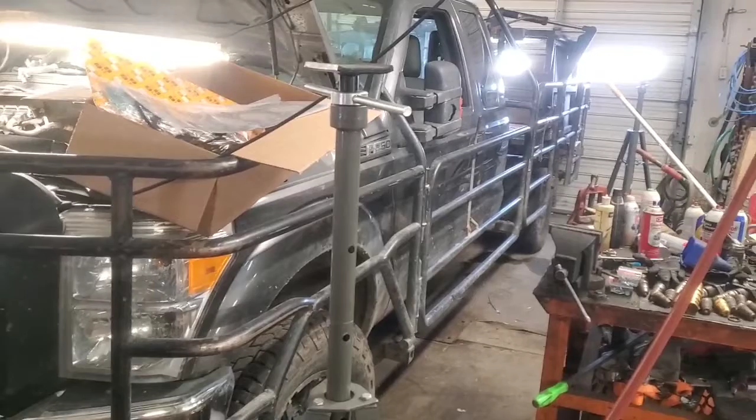Hey folks, welcome back. We're continuing on here with what we've been calling the Jurassic Park truck. You can go back to our first video where we talk about what this thing does, because it's sort of unique. Anyways, today we're doing the engine timing. We've got this 6.2 liter V8 gas, and we're gonna get all the timing components back on it and everything, so that's what I'm bringing you along with here.

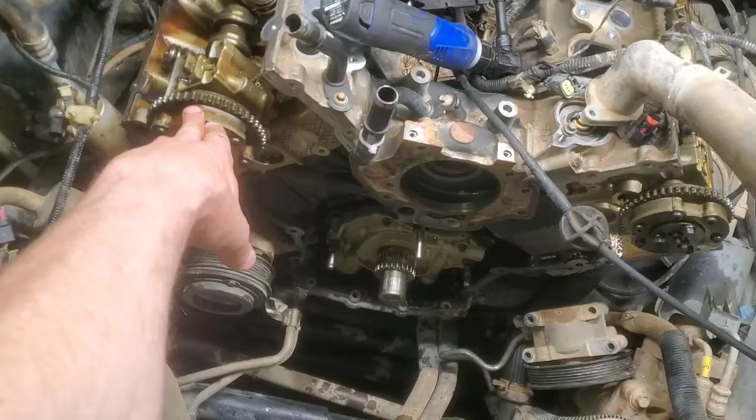To start out with, all of your rocker arms need to be off, and that will allow you to... if you don't, they'll settle away from the pressure of the valve and all that kind of stuff. I remember when I took one of the timing chains loose, this side went like that, and trying to get it back in there - as per the manual, it even tells you to have them off. And then they've got their own torque sequence about which ones to start with, but you want to have all the timing gears and all that stuff on here first.

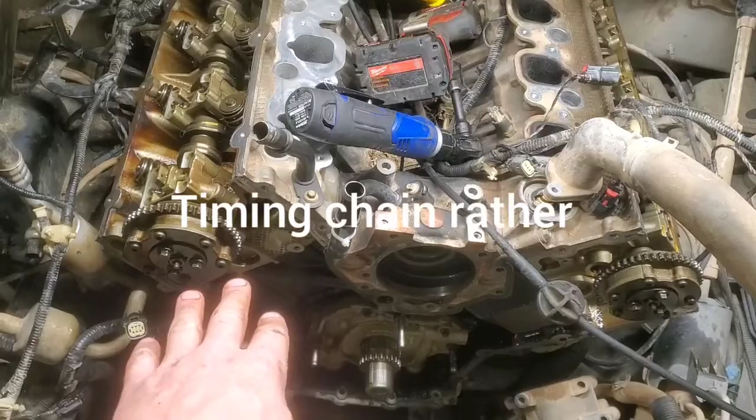So right now what we've got is the keyway right here is at about the 11 o'clock position - that's what the service manual says. And we've got the number one cylinder, which this is number one. The way this engine is, it's backwards from the way Ford used to do it. But we've got 1, 2, 3, 4, and then 5, 6, 7, 8 on that side.

So number one, the piston is all the way up at the top. Now when I set it that way, making sure that number one piston was all the way up top at the power stroke, which is basically exactly the way this camshaft is - because it doesn't matter now, I can move the crankshaft all I want to, as long as that piston is up at top dead center. This isn't going to move because there's no chain on it. But now that it will, you can see the timing mark right there, and it's going to be in about that position. I'm going to show you a picture in just a second.

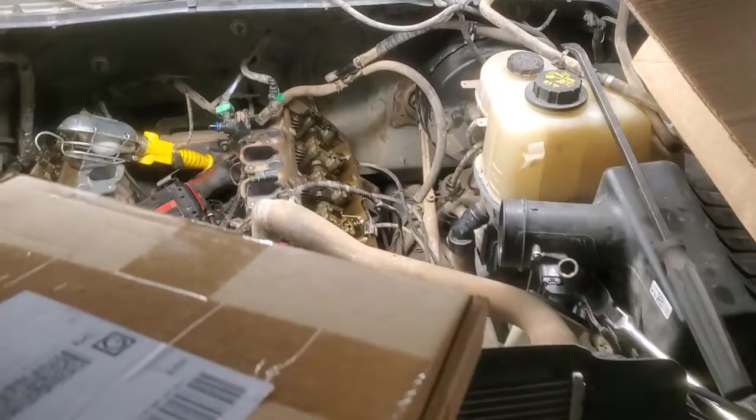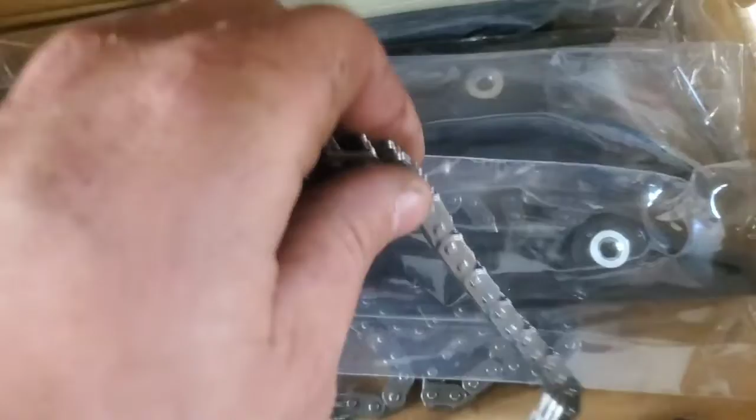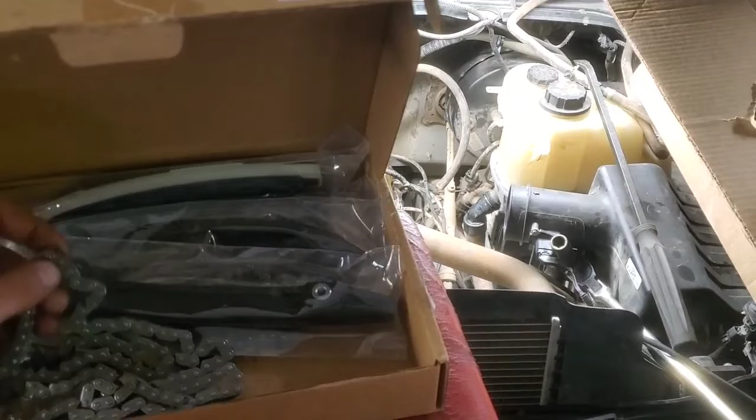And then we've got our chains, and somewhere on here they've got a different colored link. There's one right there, and then there's another one right here. Now, near as I could tell, I stretched this chain out and these links are exactly opposite of each other. I haven't seen anything in the service manual about the direction the chain goes, and I don't think it matters, but we'll figure that out because we'll know if the timing marks line up. But I think they're exactly apart - I'll show you that here.

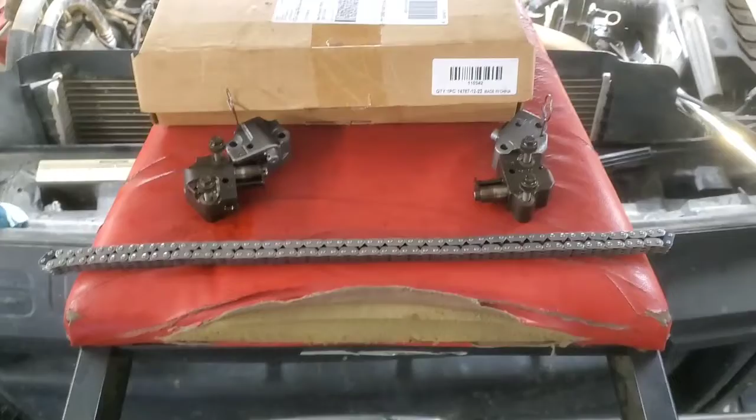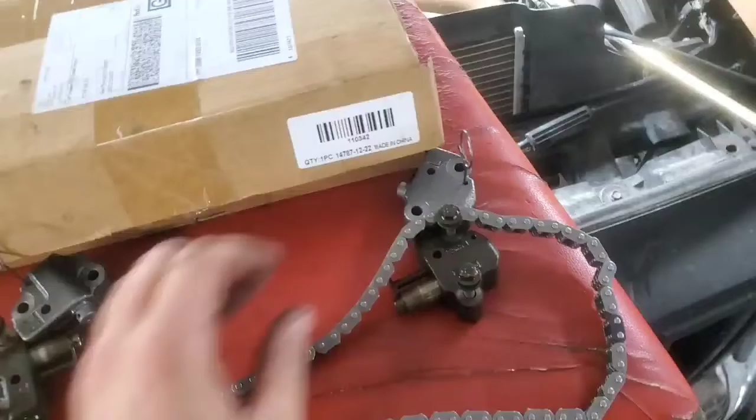Okay, so you can see how you got it all the way stretched out, and your colored links are exactly apart, so it should not matter which way this chain goes. I don't think you could put it on any other way - I guess you'd be putting it on backwards like this or something. I guess there's just no other way to really get it, so wouldn't worry about that. But sometimes on some vehicles, it's just that way.

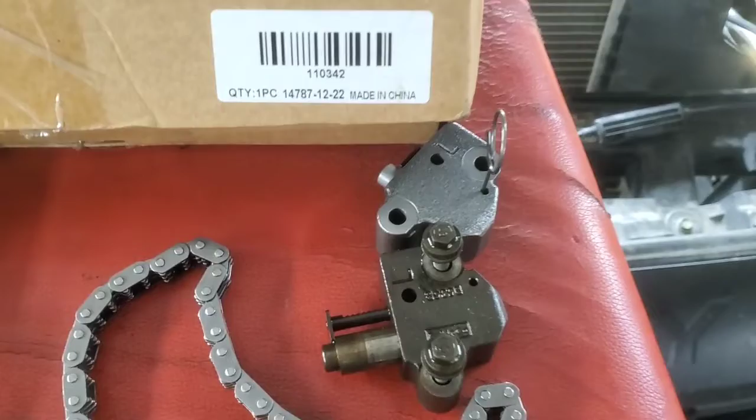These are the tensioners - there is a right and a left. You can see these ones are brand new. It's got this pin already in here, but you can see the plunger - if you were reusing these, you can take them and put them in a vise, then stick a pin down in that hole right there until it locks in. There's your left side. When they're talking about right and left, we're always talking about this being the right side of the engine if you were sitting behind it - that's just how they do it. So that's the left side of the engine, and that's the right side.

So yeah, let's go have a look-see at the pictures in the service manual, and we'll hold on a sec.

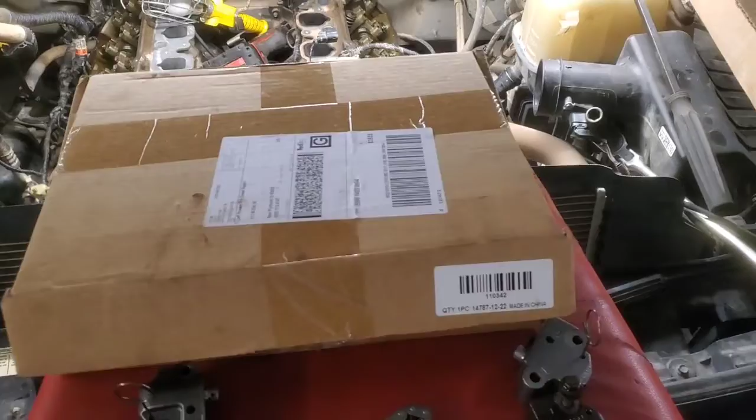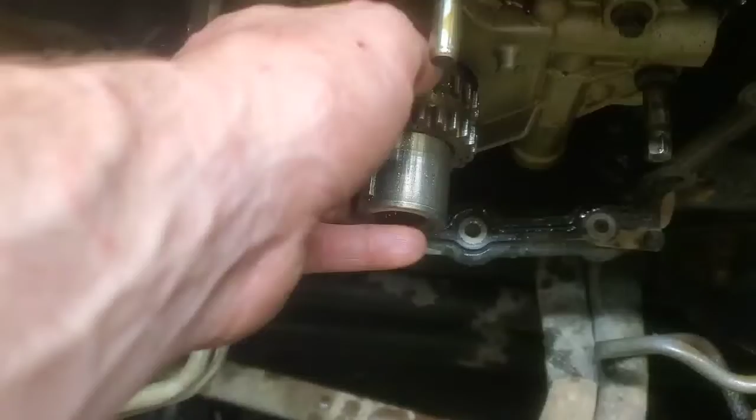We're not replacing the cam phaser sprockets - we didn't get any new ones of those - but that gear right there, it comes off. It comes off here, but it slides over the top. Here's like a Woodruff key for your harmonic balancer, but it just slides right off of here.

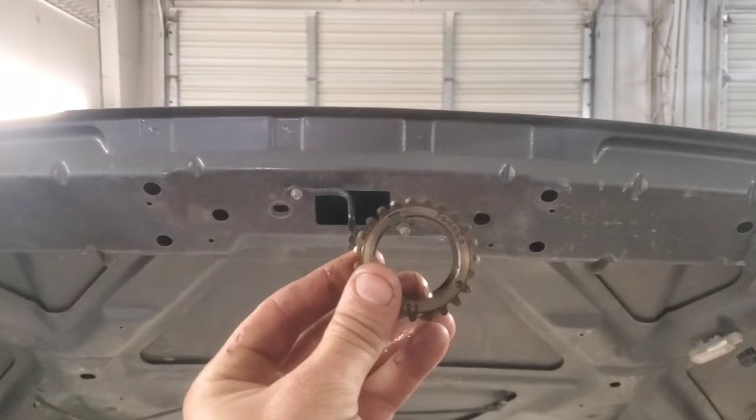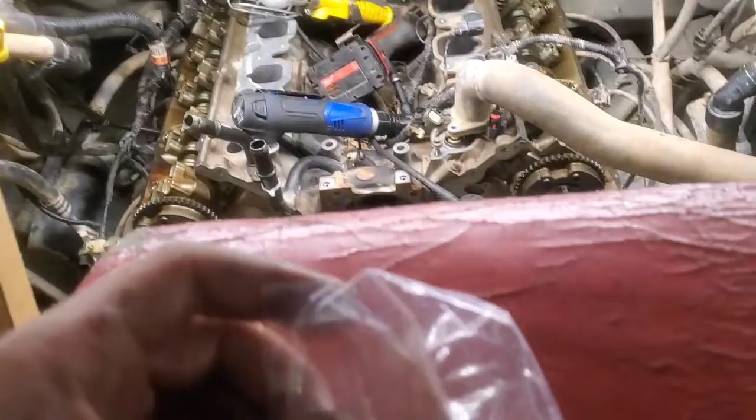And here's your bottom timing mark right there. So if you're looking at the crankshaft, this would be your 12 o'clock or midnight position, and they want it over here at about the 11 o'clock position - because then there would be 10, and over here would be 9. Simple as that. I don't know, can people even tell time on a regular clock like that anymore, the younger generation anyways? I don't know. So, got the new gear - it'll go on both ways, but you just want to make sure you got that towards the outside so you can see it, because you don't want to be putting it on backwards. That's not going to do you any good.

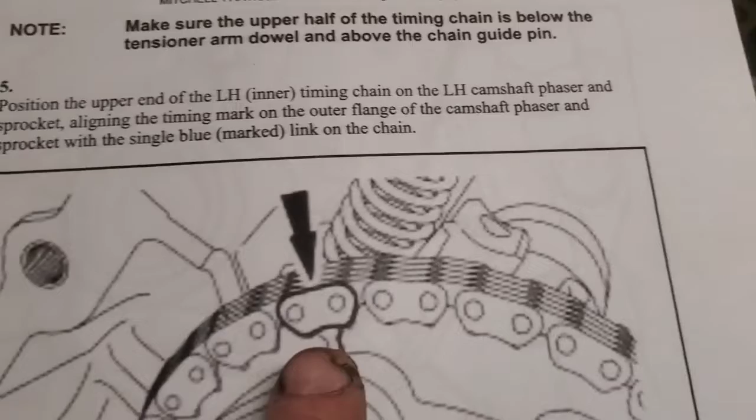Alright, so this is what they're talking about with one of those colored links and how the timing mark goes right in the center. The service manual and some other area I did see did have some chains that you might run across that'll have 2 colored links together right here. You just put the timing mark in between both of them. So imagine if this one was a colored one also, you do that.

So then I went ahead and I put a paint marker and I marked this little dimple right here, just because you're gonna kind of have to get it on there and get it started, because the chain's going to want to fall away from here, especially when it's loose.

And so you do want to start with the left side, the driver's side chain, because that one goes on the sprocket first, and then you'll want to do your passenger side chain.

But they are talking about getting this chain on here and then getting this guide on here. I think this guide doesn't have a bolt in it. It just goes on there, that pivot point right there, and then your tensioner pushes onto it there.

So yeah, they're wanting to put that on now, and then go ahead and put the tensioner on there. Don't pull your pin, it doesn't show the pin on there.

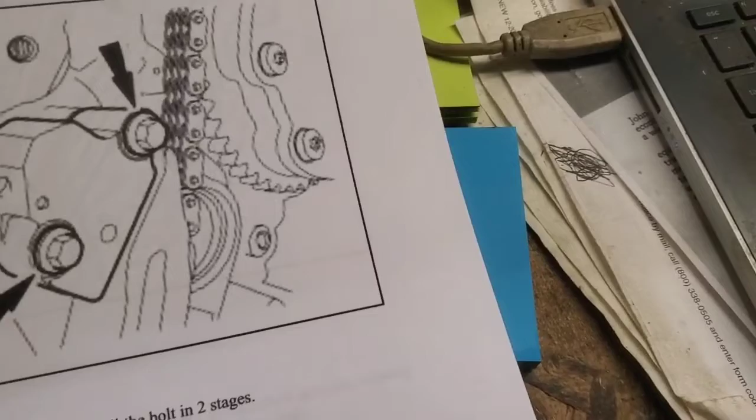And then it's tighten - they actually even got a 2-stage deal for tightening up these bolts and all that kind of stuff. 89 inch-pounds and then another 45 degrees.

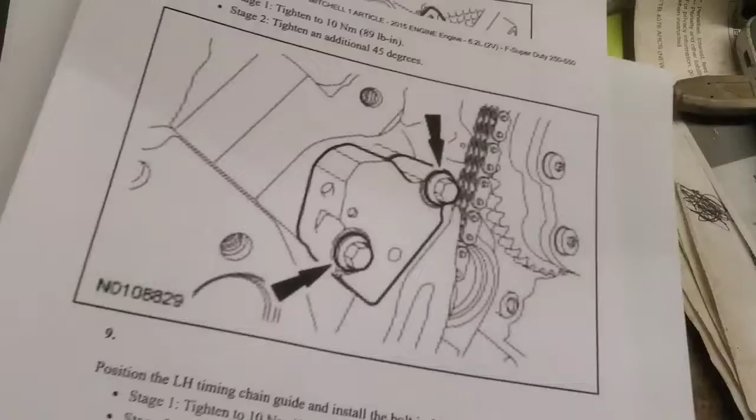Then you go ahead and you put your bottom guide in here. Now this does have a bolt, but it does have a pivot point down here. So here's your upper guide, and there's your lower guide. So it'll go on second on that chain.

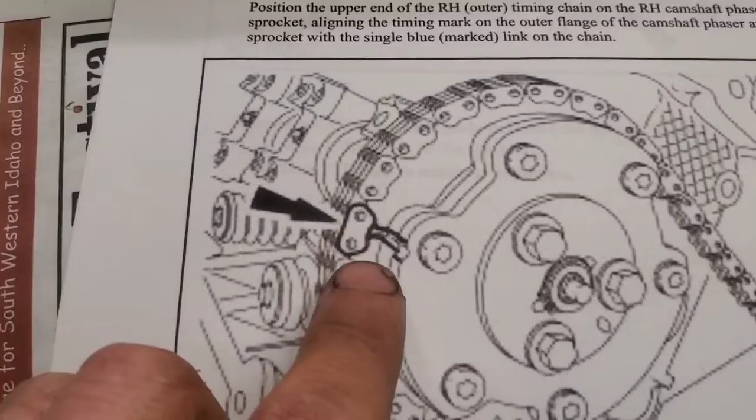Then go ahead and put your passenger side chain on and get it lined up with your dimple here, and then up top of the engine here you're going to line it up like this. Again, if you have 2 colored links on your chain, you just go in between those 2 colored links. So there's that.

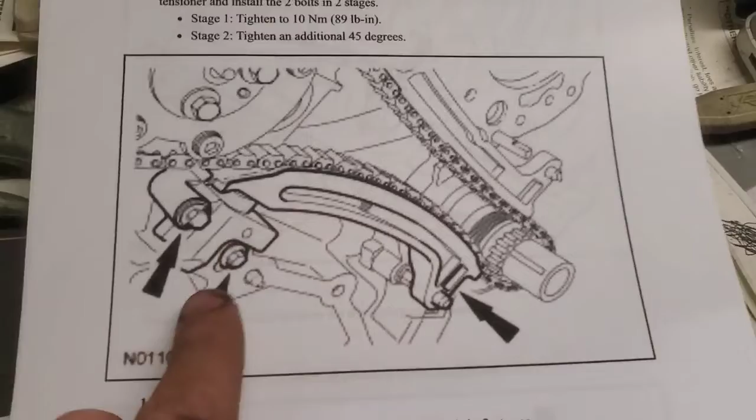And then you go ahead and put your lower guide in here. So get this lower guide in here, and then go ahead and put your tensioner in. Don't pull the pin yet, and get all that stuff lined up.

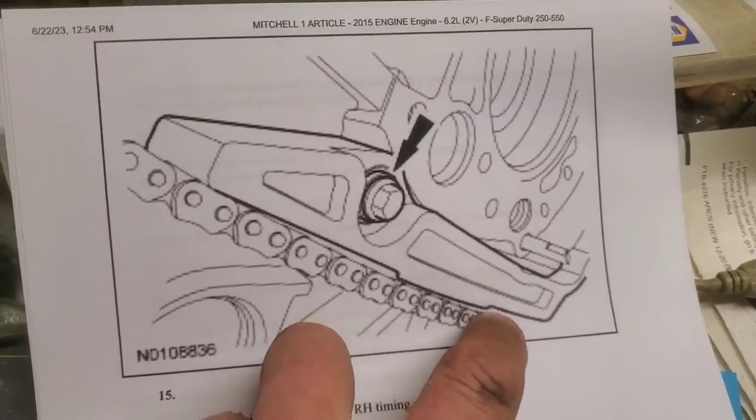And then next thing to do is get your upper guide in here, and it's held on with a bolt. Goes down to a pivot point at the bottom here and has a bolt. That other guide that we just looked at there does not have a bolt.

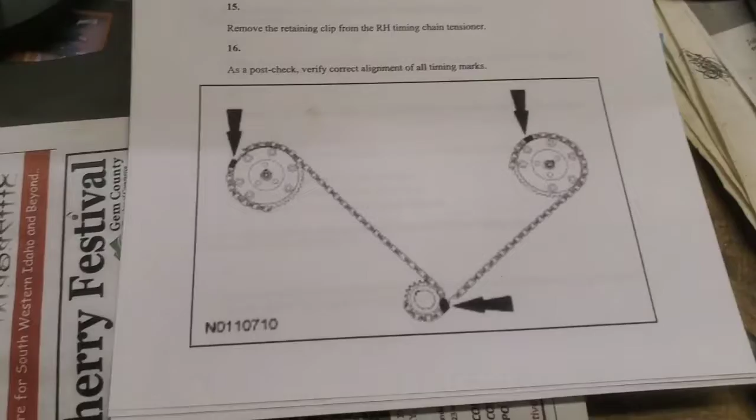And so this is essentially what your timing marks look like. This first looked kind of confusing to me. It's no more simple than the fact that they didn't draw the rest of the chain.

If I had a pin that worked - not a huge deal, but whatever.

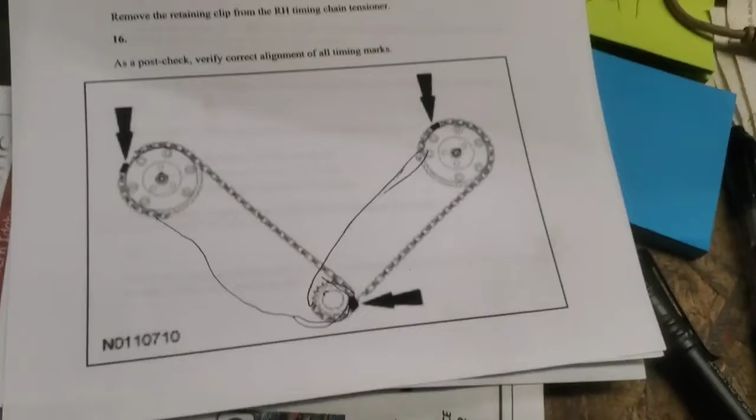But you can see, passenger side, driver's side, timing mark where it's at. There's not really any relative position to where it is to the head. You're putting it on, you're putting these, and you're doing this first.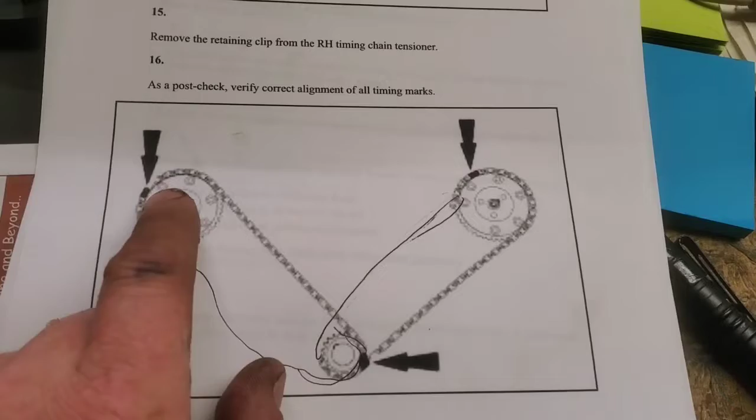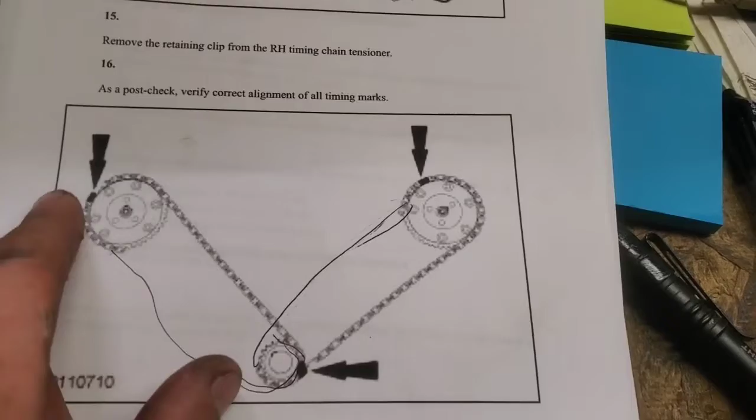You want to get this lined up first, and then you want to get this tooth lined up, because this is getting timed to that. You don't want to - there's no position to put this on here. But the timing chain's loose enough that you can get it on and off there, keeping these sprockets on there, which is nice.

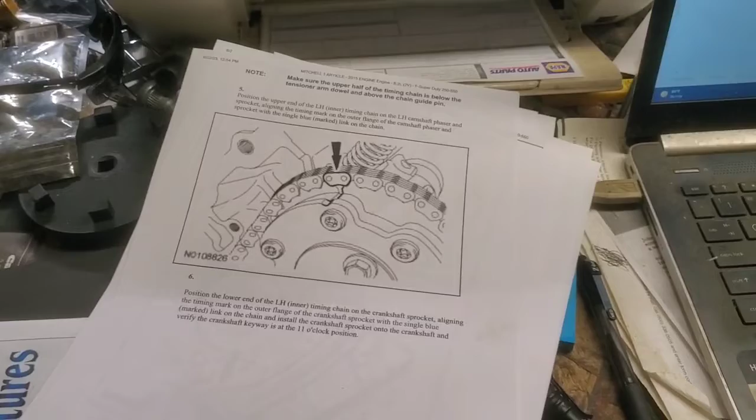And so then we'll go in later on about torquing and tightening down the rocker arms and stuff. So anyways, that's the procedure we're going to be using. I'm not going to film it exactly step by step, but I will pause and restart when I can. So like I said, I'd stop along the way.

You get it down in here, you'd think that these would be easy to see, but unless you have perfect lighting and everything - this ain't that bad, but it is kind of a shadow down in there - they're hard to see. So I went ahead and marked this across here, like that little dimple there, and you'll be able to see it through the chain.

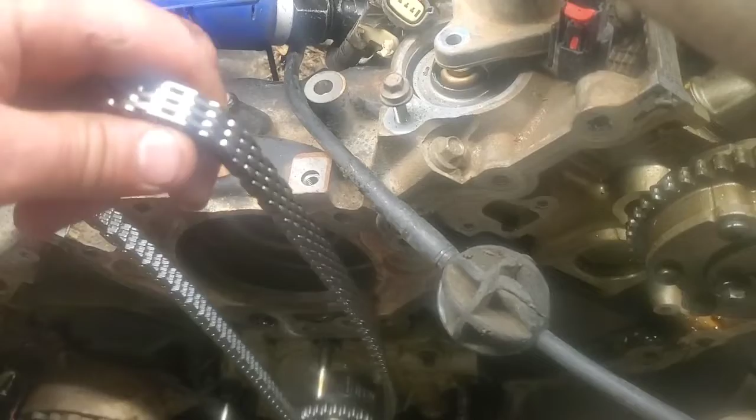So this will just slide on here, all the way to the back. Then you grab the chain and just get it started. I'm just kind of moving it with my hand right there until it settles in where it's timed at.

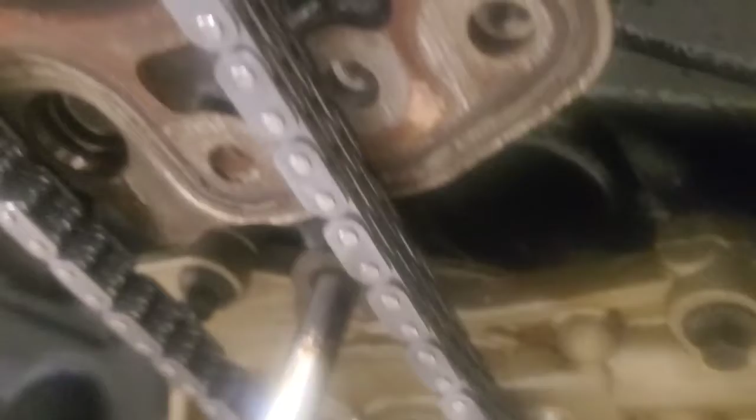I guess you're not gonna be able to see the tooth through the gear, it's not that style of chain. I'm gonna keep it tight as I go up or around, because this left part of the chain here needs to go on this side of that pin. So don't do this, that's not how it goes. It's got to go on the other side of it.

Try and do the best I can with only just two hands. I don't have a way to put this camera down in here, but hopefully I got a little bit better shot from underneath here of how this, you know, hands out of the way, there we go, how that goes up.

And lines up with that. That's what you want. So now we know, because see how it just wants to drape down. You can kind of push it like this, get it a little bit better, but it's just not quite there. I don't know why they couldn't have put that timing mark up here. That would have made more sense, but whatever.

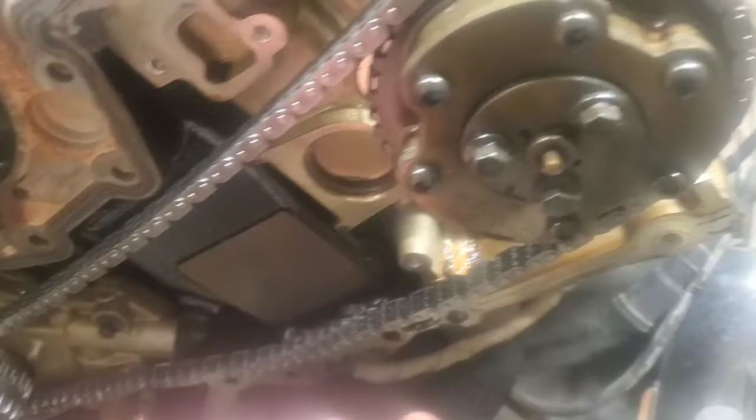And then our other one up there, I did mark this because like I said, it's hard to see, get it down here, but okay. Then make sure that you get this timing mark lined up. When we were pushing on this, this wheel moves and stuff, but that doesn't matter because we're timed so that when that deal presses it, that's where this deal is going to put it, and that's really why there's no timing marks here.

So the next thing we need to do, I think it said to do this upper one right here, this upper guide, and get it on there, and then we'll get the other one, because the lower one's going to go on this pin here, and then it's going to bolt up with a bolt right there. This top one's going to go here, and then it's just going to go right in here, and then your tensioner is going to go, and then it's going to push in this way. That's what it's going to do.

Okay, see how that goes, and our tensioner is going to push in just like that. So we're going to get it bolted up right here, and then we'll put the lower one in place there, and we're still not going to pull the pin until we get both sides done and ready and get everything checked.

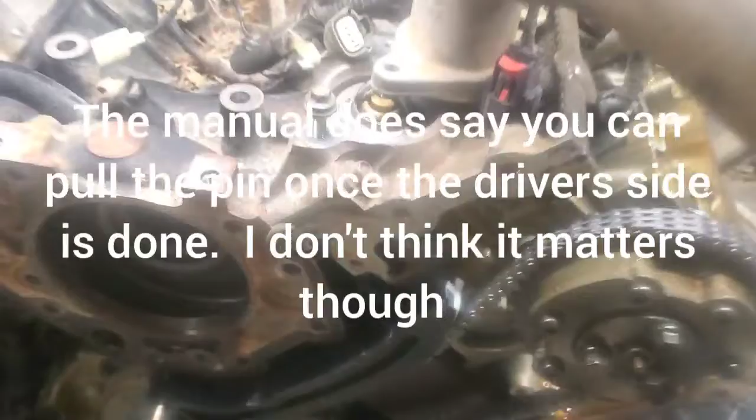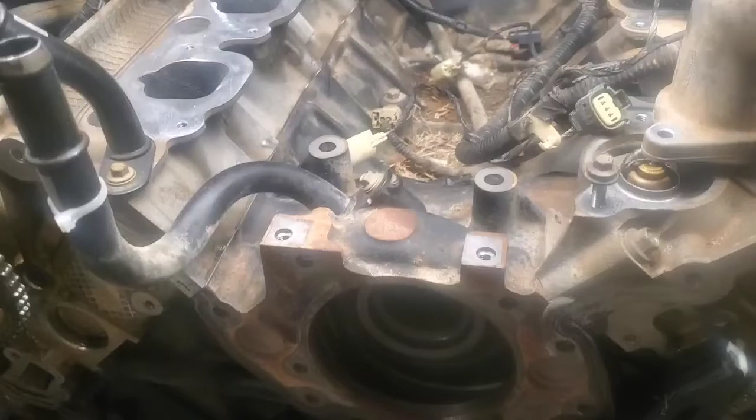Because even when I could see it up here when I did this, I'm like kind of, yeah, I think so, I still went ahead and went underneath here and looked. It's never a bad thing to be checking yourself over and over again, because this is not something you want to screw up, because if you do, like the repair that we just did, you'll be doing that again, or worse - you can totally destroy the engine.

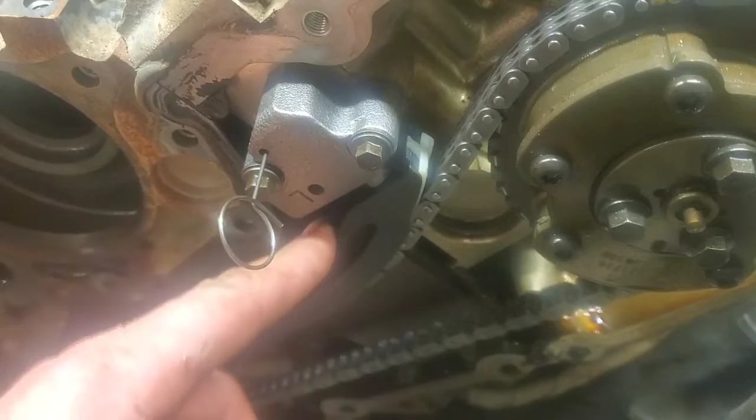Anyways, okay, there's that on, you see this is still loose. We're not going to pull the pin, and we're going to get the lower one, and we just kind of come in here and push up on this as you're kind of guiding it onto that pin there, and then get it lined up there and put your bolt in there.

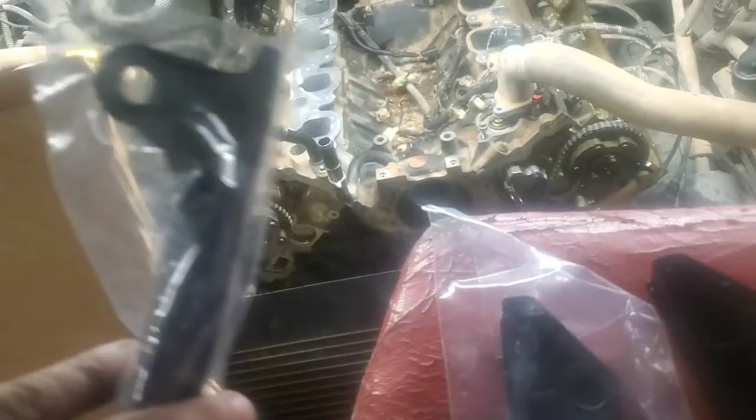One thing I did to make this a lot easier, since it's the first time I'm doing one of these engines, was I took that guide and this guide came out of the driver's side. I kept it separate, so now all I have to do is go in here, find the one that fits, because I'm sure these are all different, so they're not gonna interchange, because these don't say, as far as I'm aware, which side to go on.

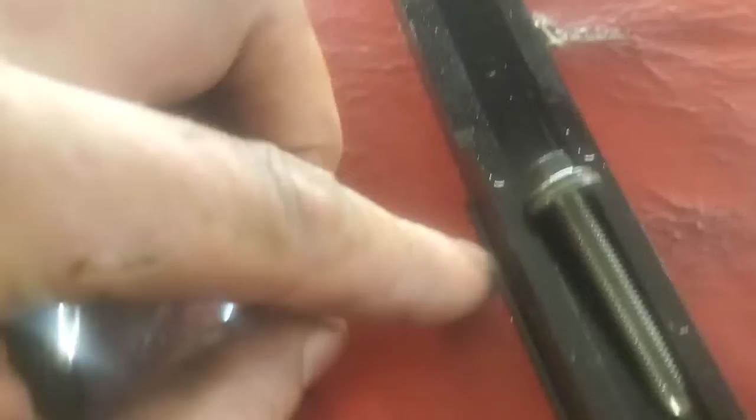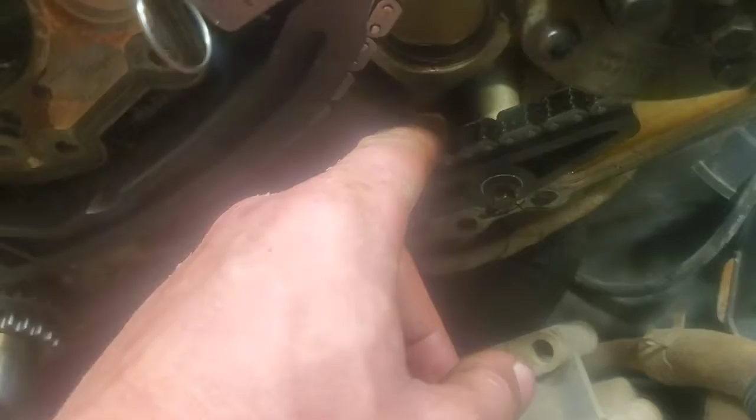But anyways, you can see that this is the side we need, and obviously the chain runs along on this side, so you'll know what track it runs on. So, and there we are. So not quite, it's a little bit loose, but it's perfect, that's what we want. So then we just double check - I mean obviously, but like I said, it's never a bad thing to make sure that things look right, you can kind of move this around a little bit, but it's never a bad idea to check it.

Just because, as I mentioned before, this is not something you want to screw up on. So that side's ready to go. Now we'll just go ahead and get the other side in.

Alright, I got that one on there. And when you get this chain on here, I don't know if you remember when you were a kid and put your bike chain on and start it, you had to just kind of walk it on a little bit. That's kind of what you got to do. I had this thing off like 2 teeth, so I had to peel it back, rotate it around some more, and just walk it right back on again. But we got the timing mark lined up there, and then we got it lined up there.

So now the next thing we're gonna do is get the bottom track, and then it's gonna go right in here, and it does not have a bolt, so it's gonna just slip over this pin here, and then goes up here, and your tensioner pushes on it in an upward direction like that, and then we'll get the top one. But we'll get this bottom one on first.

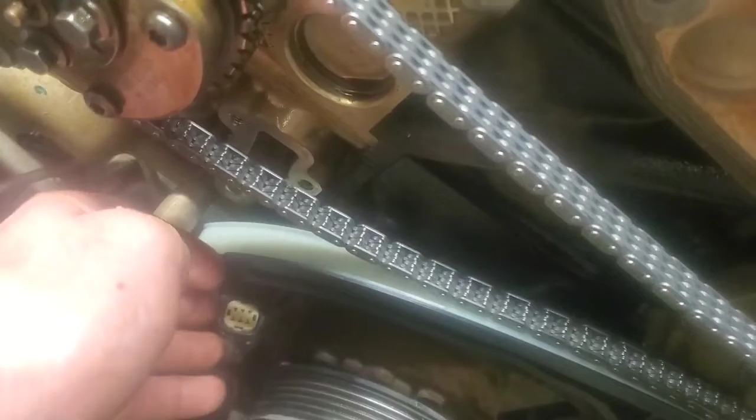Okay, just got it started on that pin underneath the chain, and it's gonna push up on here like this. Put our tensioner on, you know, there's our 2 bolts for the tensioner, and that will push up on that like that. Put that on next.

Yeah, tensioner's in. Now one thing, you see how this thing kind of wants to push this way, and it's not quite totally straight on the deal here. So if I grab this finger here and I pull it and push it down, now it's lined up perfectly. Let me show you what I was just talking about.

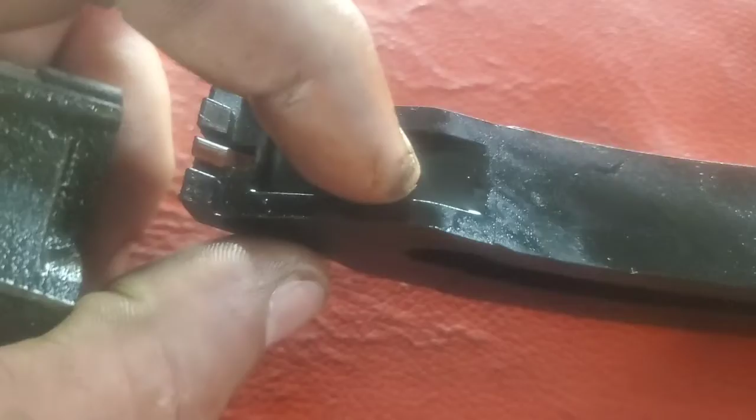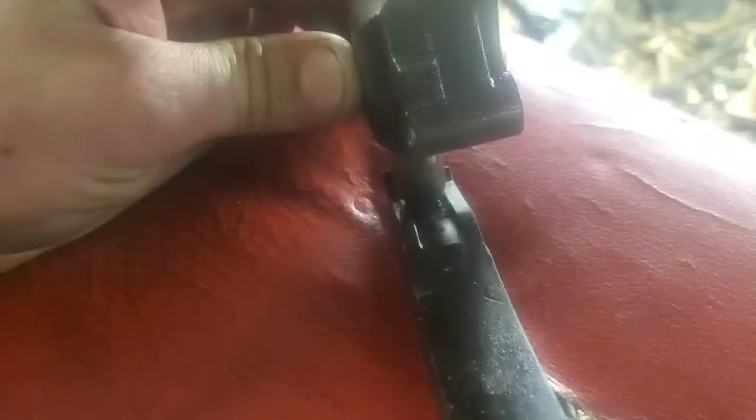Okay, you see on the back side of it, where this plunger on the old one here used to ride. Before we had it offset like this, and then when I repositioned it, we moved it to where now it fits down in here. So see how it fits in that slot there. That's what you want.

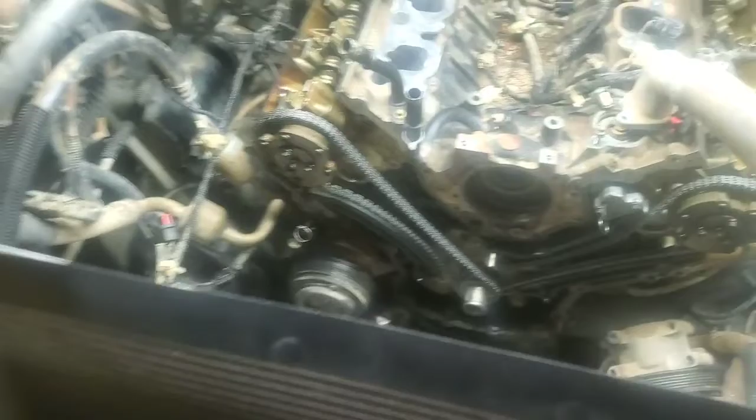So I just wanted to watch that, because when I looked at it, I'm like, oh shit, yeah, I just gotta move that thing out. So when you pull your pin and everything like that, make sure that's all lined up, both of them, make sure that's like that. That way you don't get any problems. So now we'll get the top runner on there.

Okay, so last chance to check everything. We got this top runner on here, and last time to check it, make sure everything lines up good, make sure your deal's pushed in all the way. It really can't, I mean it's obviously not going to come out of tooth, but you just want to double check, make sure everything's good.

Okay, so now we're gonna go ahead and pull the clips off. I missed this step. Apparently in the service manual, when you get done with this left side timing chain, you can go ahead and pull this pin before starting on the right side. I don't know if it really makes that huge of a difference, but we're gonna pull it out now. So you see now it's pushed a little bit, actually pushed quite a bit. It's tight.

Yeah, then we'll go ahead and make sure our deal is where it needs to be. Got that one pulled out. Everything seems nice and straight.

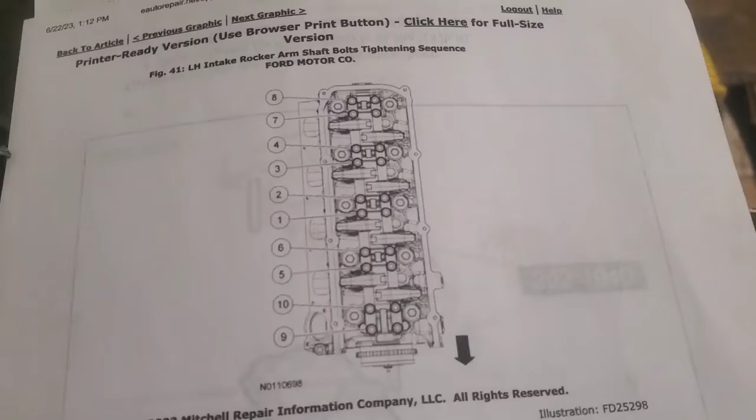Okay, so now we're gonna get these rocker arms installed on here. Let's go through what the manual talks about and see what needs to be done. Okay, so on here there is a torque sequence, 1, 2, 3, 4, back here to 5, wherever 6, 7, you can see it. This is for the left hand.

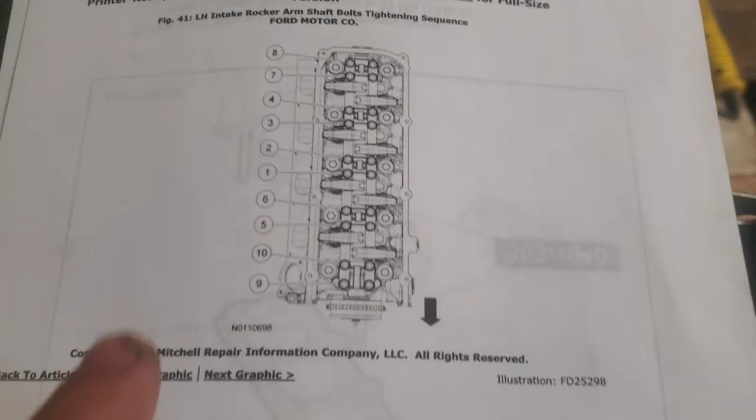This is a Mitchell manual. This is where you can pay $20 and get this manual - it'd save your life, being able to have this.

I wrote these down because it talks about tightening each one of these in stages. So you're going to go 89 inch-pounds, 1, 2, 3, all the way to the last one, and then you're going to do 177 inch-pounds. Same thing, 1, 2, 3, all the way to the last one, and then an additional 60 degrees. So 60 degrees, 1, 2. That's what we got there.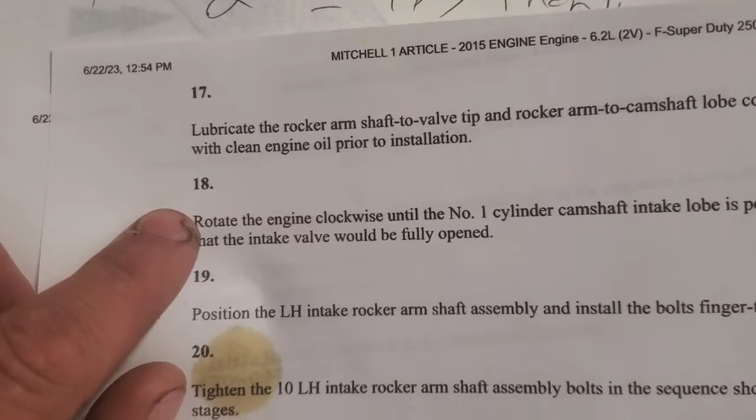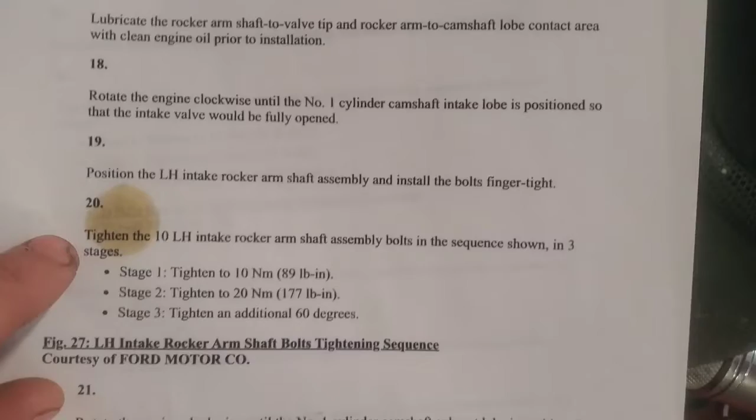So here it says: rotate the engine clockwise until the number 1 cylinder camshaft intake lobe is positioned so that the valve would be fully opened. Then position the left-hand intake rocker arm assembly and install the bolts finger tight. Then we're going to tighten these in stages, in the sequence shown, because we're talking about the left-hand intake rocker.

So let's go on the engine.

Okay, so what I'm going to do is put the bolt back in right here that goes in for that harmonic balancer. These are your intake lobes on this side, same with the intake valves on this side, so the other ones are the exhaust.

So this would be your intake lobe, so you'd want to rotate this - since you don't have a rocker arm on here, you just have to rotate the lobe about where you'd think it's going to be, because this is cylinder number 1 that they're talking about. So you rotate this until this valve would be fully open - the lobe is clear over here - and you want to rotate it clockwise, not backwards. I mean, I guess you could, but just do what it says.

Rotate it clockwise till this lobe comes up, and it's going to be right about there - that's pretty close. Then go ahead and set the left-hand intake rocker on here and get the bolts in finger tight. It's telling you to do this position because the valves are going to be in a position such that it's probably going to be easier to get this rocker arm on here. We'll figure that out as we go.

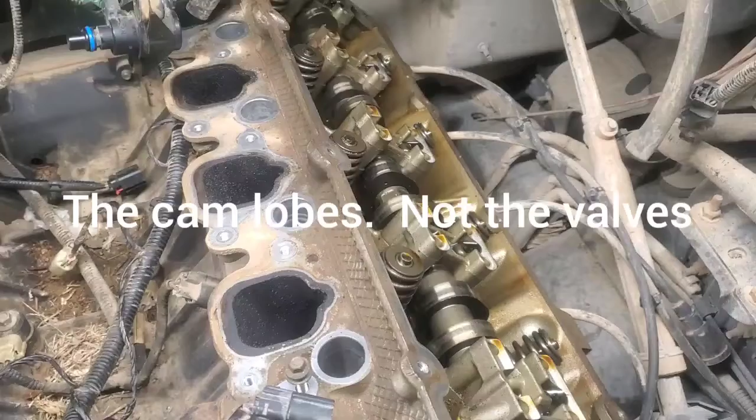This should be real easy to turn, because you don't have any spark plugs in the holes - well, the lower spark plugs are in. But remember, on the head, both those spark plugs go into the hole, so with one of them out, you're not going to have any compression. That's the best way to do it.

Okay, so we got this cylinder number 1 cam lobe positioned up - did that first, and now I've got this thing set down on here, all finger tight. That's why it wants you in that position, because none of these rockers are trying to open any of these valves, so when you go to tighten this down, you're not having it crooked and having to push down a valve, which happens on some heads. But this one, they figured this position works good.

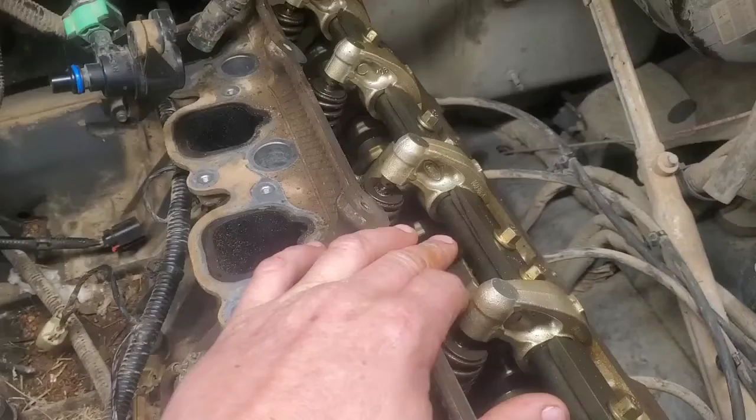So the next step is to tighten these up in those 3 stages we talked about before. I'll go ahead and get that done.

All right, that one is torqued now, so let's move on to the next step.

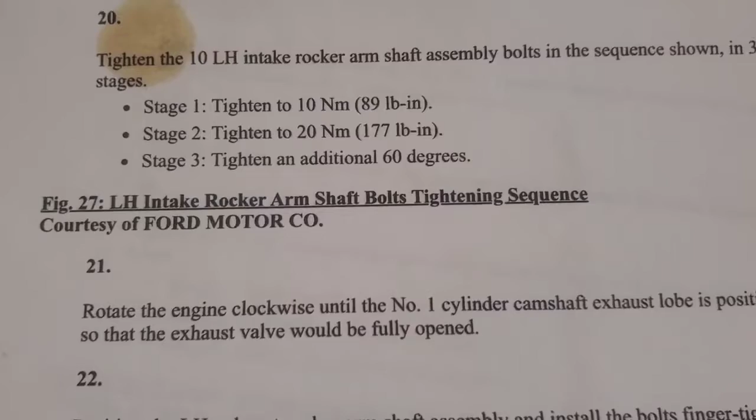All right, we are here, step 21. You know, like when you're on this with the computer and stuff, you see something like this highlighted - this will take you to this picture right here.

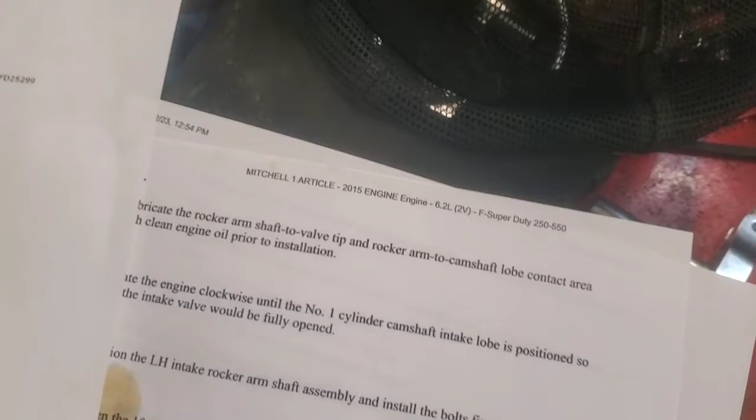So we're done with this picture, because now we're going to be looking for the left-hand exhaust valve. This is the torque sequence for it, same stages of tightness. Now what we're going to do is rotate the engine clockwise until the number 1 cylinder camshaft exhaust lobe is positioned so that the exhaust valve would now be fully open. Last time we did it with the intake, now we're going to do it with the exhaust valve.

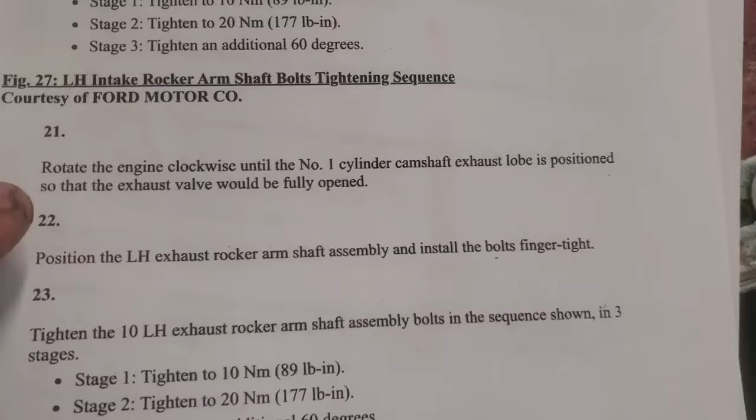So then you'll position the left-hand exhaust rocker arm shaft assembly and install the bolts finger tight, and then do the same stages. That's what we're going to be doing.

All right, so there's your exhaust cam lobe. We rotated the engine clockwise until that lobe came up, because these rockers are riding pretty much exactly in the center here, where the rollers on the rocker sit on the lobes of the camshaft, right about the center there.

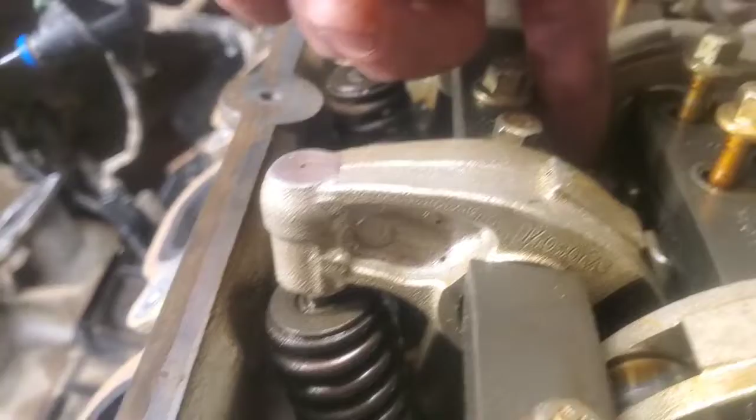This is 22 millimeter, by the way. Anytime while you're rolling this engine around, obviously some of these valves operated. You want to just roll it around, but you want to be checking for any binding or stuff like that, because that'll indicate that you've got something going on that you don't want.

So anyways, now we've got to get these things down, just finger tight, and then torque them up, and then we'll move on to the next step. Okay, so that's all torqued up. Let's move on to the next step.

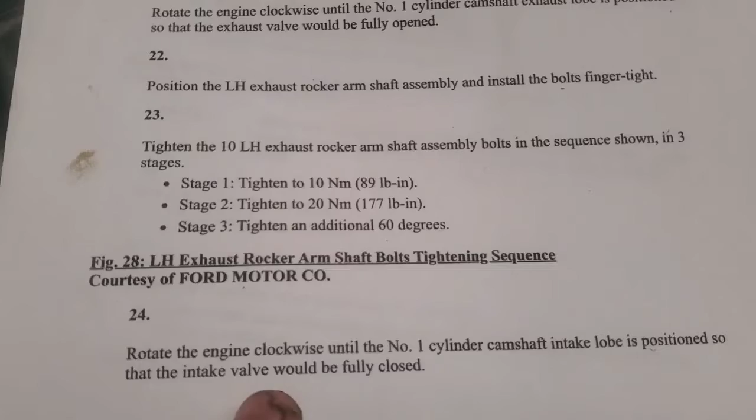Okay, step 24 right here. I'm going to rotate the engine clockwise until the number 1 cylinder camshaft intake lobe is positioned so that the intake valve would be fully closed.

Okay, so there is the intake lobe, and obviously we left it with the exhaust one up. So right now, in this position, that valve will be fully closed because the rocker won't be pushing the valve open. So we're just going to leave the engine where it is right now.

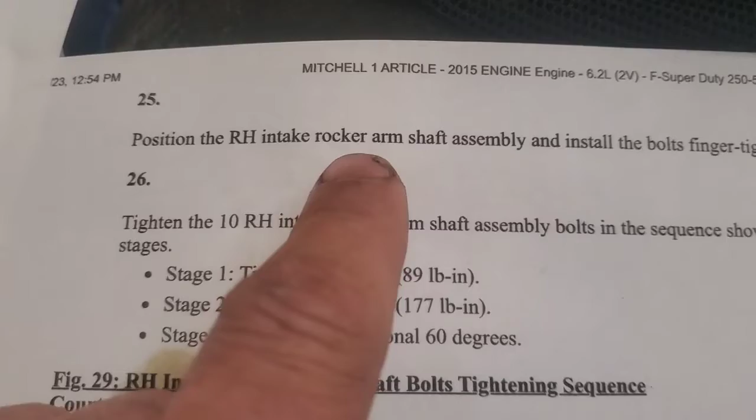Okay, so now we're going to position the right hand intake rocker arm shaft assembly and install the bolts finger tight. Then after that, we'll torque them up. Then we'll go on to the next step.

Okay, so when I put this thing in place here, this side was all cocked up about that far, because some of these lobes over here were where the valve would be in the open position. So what I did was I just rotated the engine around a little bit.

This camshaft lobe we're talking about did pass through and lift this up, but I found a good position where, since none of these are finger tight yet, it's just sitting on here. Now it's pretty much sitting all level, and it's easier that way to get this thing started rather than trying to push a valve open. So I found a good spot where it's pretty much all sitting down, where this mates up right here.

So anyways, now we've just got to get these things in finger tight, and then torque them up, and then we should be good to go with doing the next step.

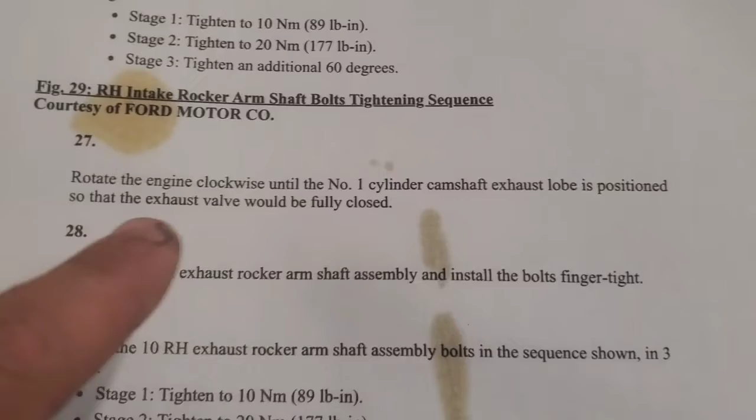All right, so now I'm going to rotate the engine clockwise again until the number 1 cylinder camshaft exhaust lobe is positioned so that the exhaust valve would be fully closed. We're kind of going to have to do the same thing, because right now I don't know if this position is going to work or not. From what I can see, most of the lobes look like they're down, with the exception of this one right here, but it might be okay.

So now we're just going to go ahead and set down this exhaust rocker, do the same thing, and get it torqued up. If I can rotate the engine a little bit and find a better position for it to sit down on, that's all the better while tightening it. If not, you have to be careful setting it down and torquing these bolts a little bit at a time, different ones, and you might even have to go out of order just to help seat it down. But you'll start seeing it sitting in place. I think right now I'm going to go ahead and set it on there. I think it should be good.

All right, so we got that all on there. Rotated the engine around a number of times just to make sure nothing's binding or anything like that. I can feel compression, or hear it coming up out of the spark plug holes as I rotate it around, so that's good.